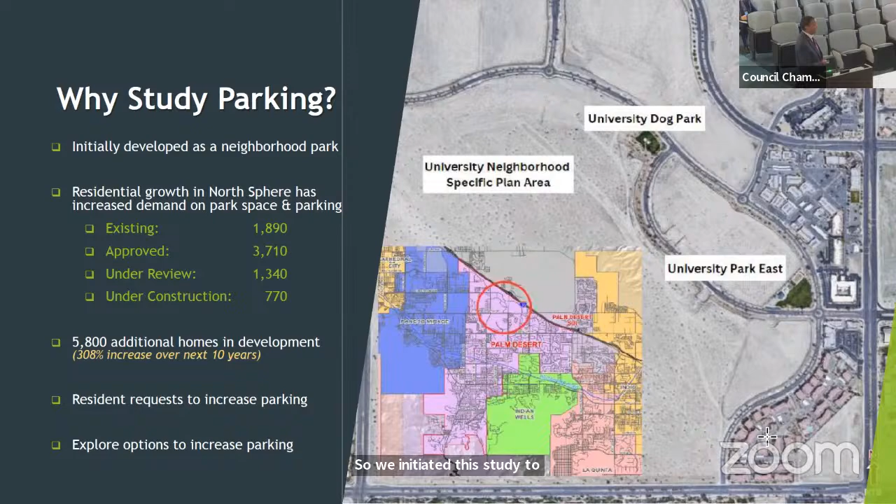Currently, the University Dog Park is sitting on the southwest corner of College Drive and University Park Drive on the north side of the city. There is no parking on both sides of the streets on College Drive and University Park Drive. University Park Drive and College Drive share the same roadway characteristics. They're both 46-foot wide from curb to curb with 11-foot travel lanes in each direction and a 6-foot bike lane on both sides of the street, with a raised 12-foot median island separating the two directions of traffic. However, the speed limit on University Park is 35 miles per hour, and on College Drive it's 40 miles per hour.

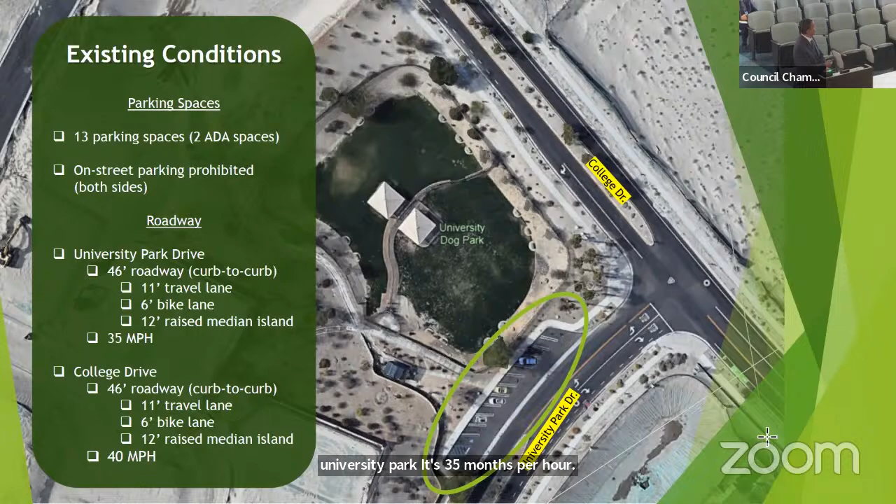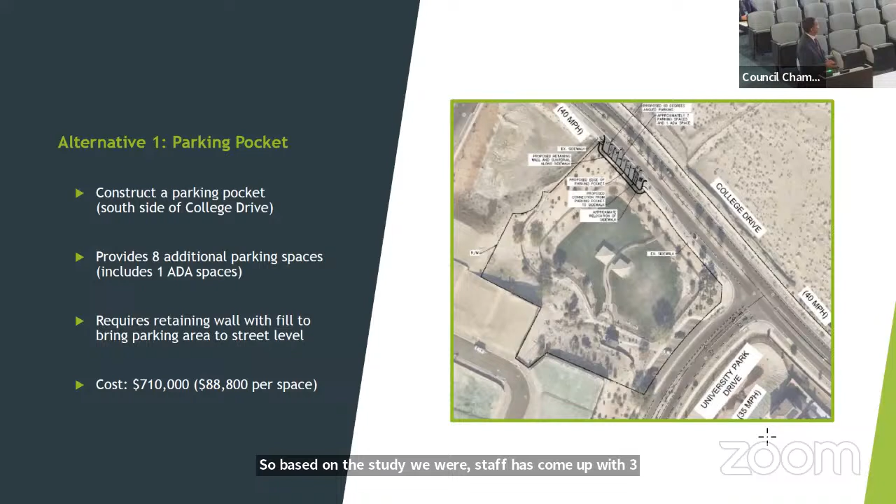Based on the study we performed, staff has come up with 3 alternatives for possible additional parking spaces. The first alternative is to build a parking pocket on the south side of College Drive. This alternative will provide 8 additional parking spaces, of which 1 is an ADA space. However, because this location is sitting very close to a slope, there will be a lot of earthwork required, as well as a retaining wall to keep the parking level at the street level. The cost of this option comes out to about $710,000, or almost $88,000 per parking space.

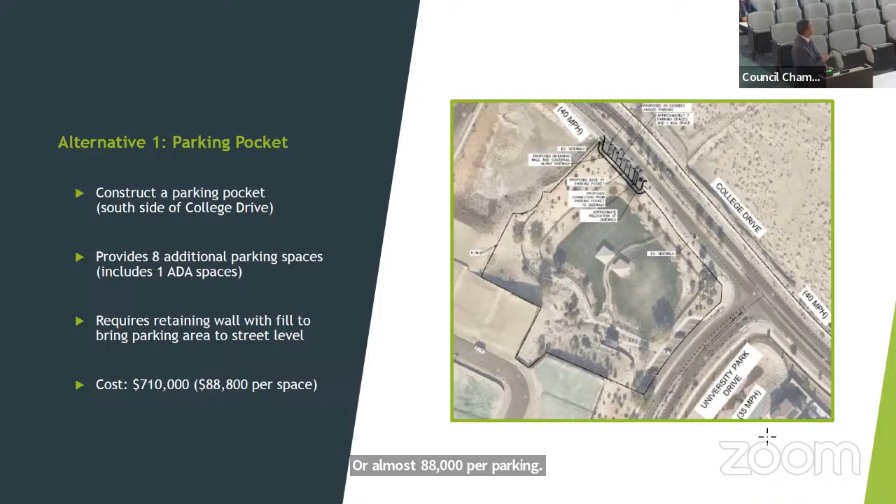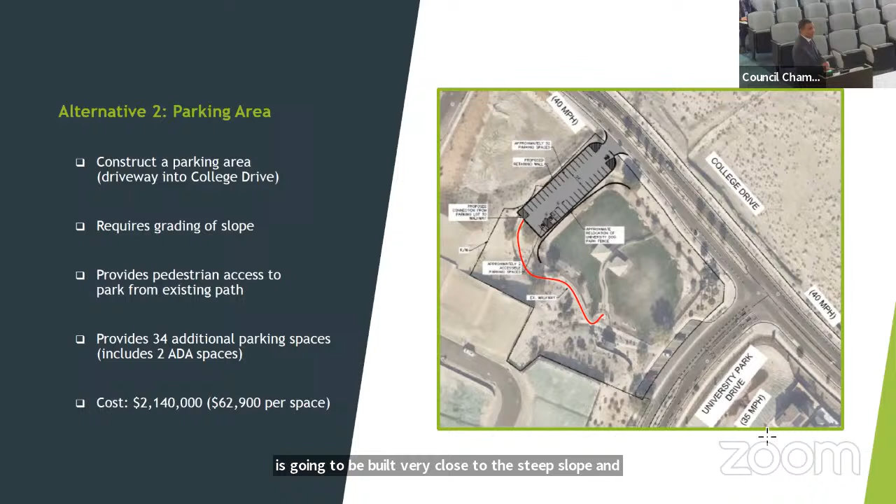Alternative 2 is to build a parking area above the dog park. This parking area will have vehicular access from College Drive, and it will have pedestrian access from the existing pathway shown here in the red line in the picture. This option will provide 34 additional parking spaces, of which 2 will be ADA spaces. However, just like the first alternative, this is going to be built very close to a steep slope, and therefore a lot of earthwork and retaining wall will be required to stabilize it in place. This alternative comes at the cost of $2.14 million, or almost $62,900 per space.

Alternative three is street parking, which will be on University Park Drive between Baylor Way and College Drive. In order to install on-street parking on this section of roadway, we have to remove the existing median island as well as the bike lanes on both sides of the street. We will be diverting bicycle traffic onto the sidewalks, and that would provide 42 additional parking spaces on both sides, almost 21 per side of the street.

However, if we go with this alternative, we need to install a mid-block crosswalk. This crosswalk will have rectangular rapid flashing beacons, also known as RRFB units. This alternative has two options: either we go with the raised crosswalk or just a striped crosswalk. If we go with the striped crosswalk, the cost will be around $440,000, or $10,500 per space. If we go with the raised crosswalk, the cost comes out to almost $700,000, at about $16,500 per space.

Here's a summary of the alternatives we just presented and the total cost of each. With alternative one, the parking pocket, we're looking at an additional 8 parking spaces at a cost of $88,800 per space, or a total of $710,000.

Alternative two is the parking area above the park, which will give us 34 additional spaces at a cost of $62,900 per space.

That's $2,140,000 total. Alternative three depends on whether we go with a raised crosswalk or a striped crosswalk. With the raised crosswalk, that gives us 42 spaces at $16,500 per space, or a total of $694,000. With a regular striped crosswalk, the cost comes down to $10,500 per space, or a total of $440,000.

With that, I conclude the first part of my presentation, and I'll take questions.

Can you go back to that prior slide? This one? So on University Park Drive, is that where we'd be putting the crosswalk? Yes. What's the speed limit on that street? 35. That was my only question at this point.

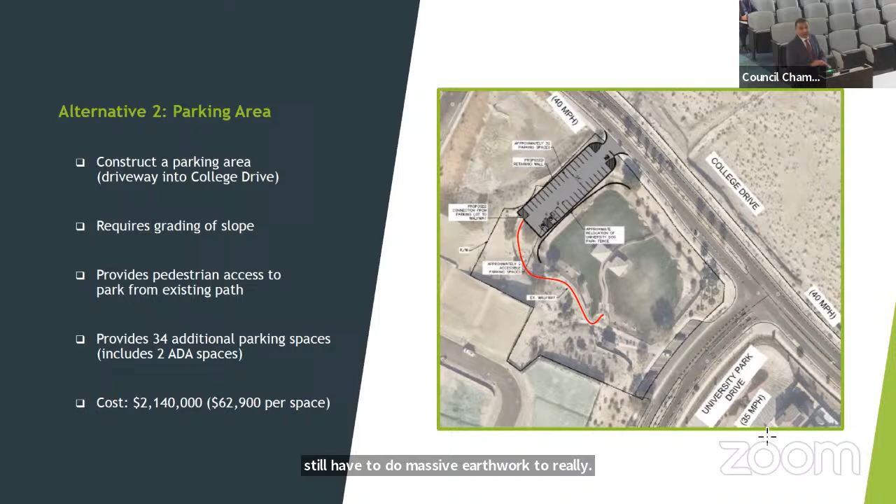I haven't looked into that option, but the issue we have here is the steep slope area. Even with an informal, unpaved parking lot, we'd still have to do massive earthwork to flatten it out and make it accessible for traffic. Okay, thank you.

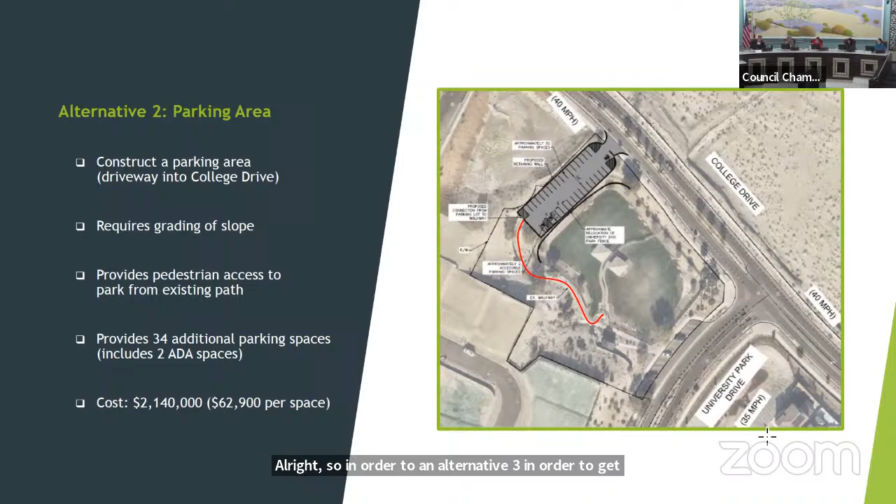So for alternative three, in order to get those 42 parking spaces, what length or distance are we talking about along University Park? Quarter mile, half mile? From Baylor Way to College Drive, it's about 800 feet in total.

Oh okay, and this is a little outside what you presented today. However, I understand the 27-acre park we're going to have on the north side of the city, the PASEO park, will have a dog park. So I'm wondering, long-term, if alternative 3 could be reversed if the pressure on that dog park is alleviated by having another dog park on the north end of town. It's just food for thought. We may also have another larger park coming in at Frank Sinatra and Portola which could add a dog park, so just thinking down the road.

Thank you. It could be reversed by removing the parking spaces. Exactly. Alternative 3 seems to me like the one that could most easily be reversed. Yeah, and at that time, whether we want to go back to the same existing configuration or just leave it open with a striped median instead of putting it back. Perfect, thank you.

Okay, so I'm looking at alternative 3, did we label them A and B? Yes we did. So College is 40 miles an hour, right? And do you think that's an advisable rate of speed? Well, these speed limits were established based on speed studies.

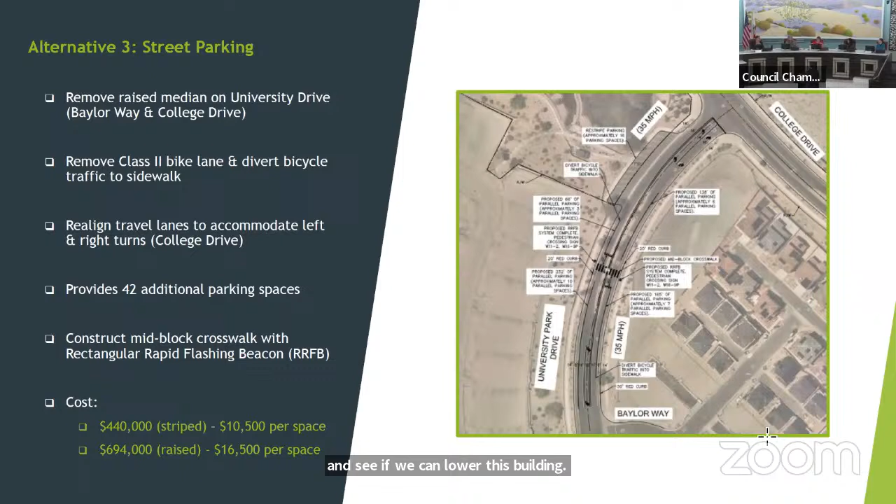I had noticed the same thing in terms of driver behavior going from one speed limit into another. And I see the clear need to create opportunities. In fact, there had been one resident that called very many times when she would see people that were parked illegally. And I'm sure this contributed to how we can create a solution. I think that going out of our way to have a lot of parking beyond that, I don't think would be very helpful. I also didn't see how many of those would be designated as ADA parking spaces. It just said 42 spaces.

And as mentioned, the fact that we will have a regional park that will have its own dog park will reduce the stress on this park. And I think it would not be wise to make an expense on such a great scale where we may feel like we overdid it in one need. And when we install on-street parking, we usually do not designate ADA spaces. But the other ones mentioned, so that's why I was asking. Yeah, the other ones would have it, yes.

How many ADA spaces currently exist? The existing ones are two. I'm sorry, let me just double check, the existing ones you're talking about, the ones we have? Yes. Two ADA spaces? Yes. A total of 13. Okay, so if we did put on-street parking, we could designate perhaps one or two more of the 13 as ADA? Yes, we can.

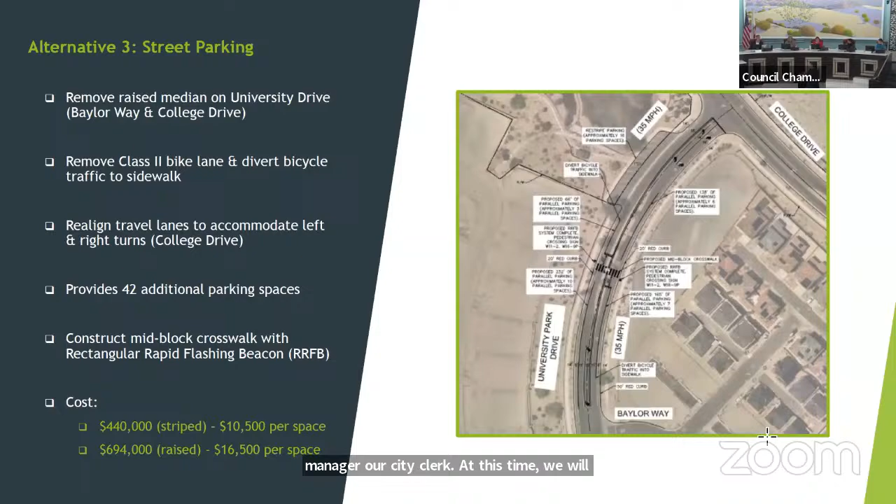We're now starting the second part of this session, the El Paseo mid-block crossings. We'll go over why we did the study, examine the existing raised crosswalks, make recommendations, go over the new crosswalk alternatives and recommendations, and the overall total cost summary. Merchants on El Paseo have requested the city install additional raised crosswalks on El Paseo between Highway 74 and San Pablo Avenue. We divided this study into two parts.

We examined the existing crosswalks in the area and the feasibility of continuing to keep them. And we also looked into the feasibility of installing 3 new crosswalks within the section between Highway 74 and San Pablo.

Of the current existing crosswalks, we have one on El Paseo between San Pablo and Larkspur Lane. The other one is on El Paseo between Larkspur Lane and San Luis Rey. And the third one is on Larkspur Lane between El Paseo and Shadow Mountain, the one in front of Hotel Paseo. All 3 locations are currently equipped with rectangular rapid flashing beacons, also known as RRFBs.

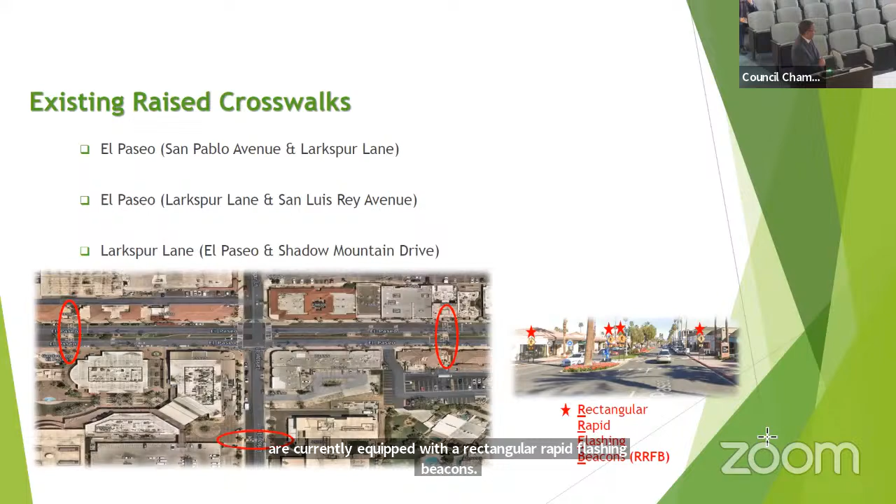Here's a look at the existing crosswalk in front of the Hotel Paseo. So based on the study that we performed, the staff is recommending to keep the 3 existing raised crosswalks on El Paseo. However, staff is also recommending replacing the existing RRFB units at all 3 locations, replace them with new

units. With the exception on Larkspur Lane, because the existing sidewalk on the west side of the street is very narrow. So the installation of the RRFB units would really limit the space, and it may be an issue with meeting ADA requirements, and also putting the RRFB units very close to the street, making them prone to being hit by high-profile vehicles.

So in order to mitigate this issue, we are recommending installing a bulb out, also known as a curb extension, on both sides of the street to give us the space we need to accommodate an ADA compliant sidewalk, as well as be able to install our equipment without it being hit by vehicles.

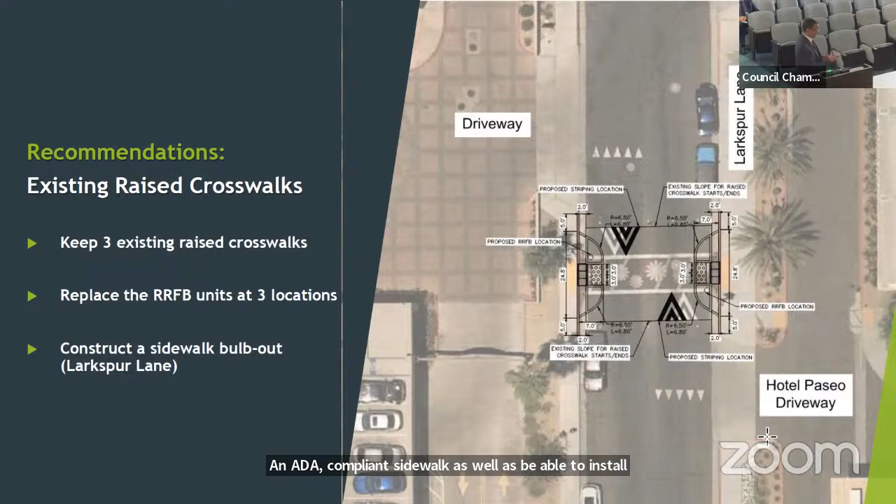So with the three existing crosswalks in the El Paseo area, again, we are recommending to keep the two on El Paseo and replace the existing RRFB units. And that comes at a cost of $130,000 per location. And on Larkspur, because we are recommending installation of the bulb outs, we're looking at $240,000 at that location of improvement. So total improvements on existing raised crosswalks come to about $500,000.

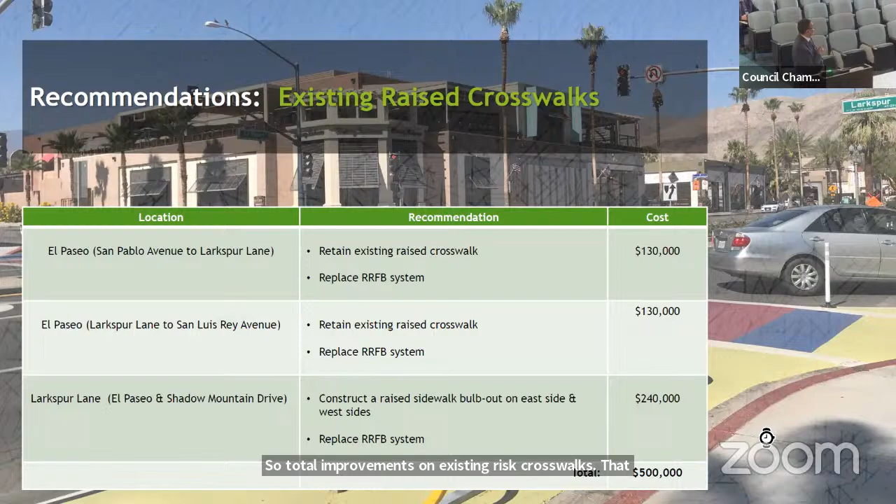Now we're moving to the second section, which was the evaluation of potential installation of new raised crosswalks. We divided the section of the road into three segments. The first segment is El Paseo between Ocotillo Drive and Sage Lane. The second segment is El Paseo between Sage Lane and Lupine Lane. And the third segment is the one between Lupine Lane and San Pablo Avenue.

In the study here, we did field observations of existing roadway conditions as well as pedestrian crossing patterns. We took traffic volume counts, and we also analyzed the 5-year accident history, vehicles versus pedestrians. So based on our observations, the accident history had no vehicle pedestrian accidents in the past 5 years.

And the existing field conditions for the section between Ocotillo Drive and Sage Lane: it's 800 feet long. The fronting development consists mainly of a lot of restaurants and a jewelry shop there. There are two pedestrian connecting passages that take you to the parking lot behind the shops. There are no driveways along this segment of the road.

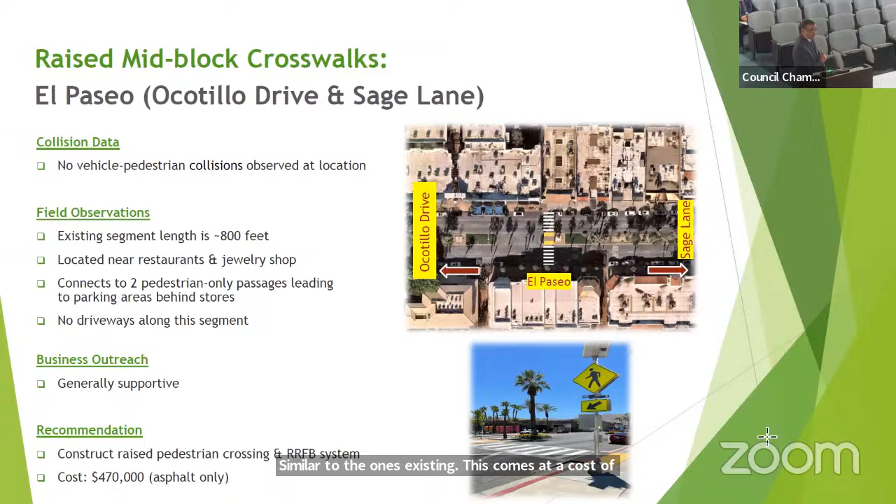The second location is El Paseo between Sage Lane and Lupine Lane. And again, in the 5-year accident history, there are no vehicle pedestrian accidents. This segment of the roadway is 675 feet long. The fronting developments are mainly retail stores with 2 jewelry shops in the area. And there are 2 pedestrian passages that connect the street with the parking lots behind the shops. There are also no driveways along this segment of the road.

And again, we did the outreach here and we got majority support from merchants in the area. Staff is also recommending the construction of a raised pedestrian crosswalk within this segment along with the RRFB units. And again, the cost here, if we just go with regular asphalt only, is going to come out to $470,000.

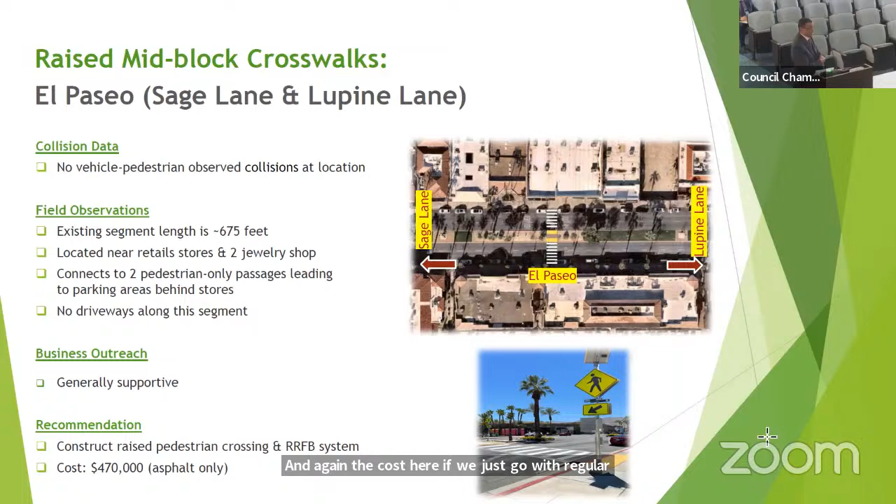The third segment is El Paseo between Lupine Lane and San Pablo. No accidents reported in the last 5 years. Field conditions revealed that the total length of this area is about 510 feet. Again, the fronting developments are retail stores and a coffee shop there. And this connects shopping centers with the interior of another shopping center in the area. However, there is a driveway that fronts El Paseo on this segment that is located almost halfway between the 2 intersections.

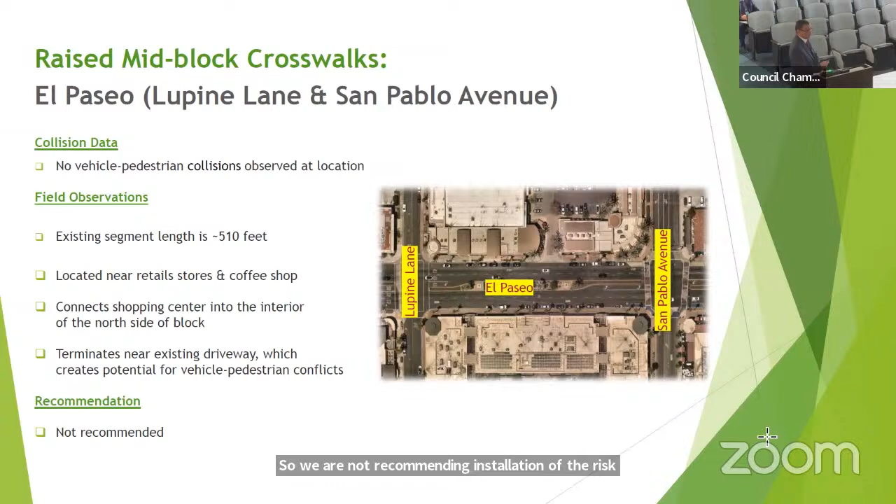Because of this driveway, it will be very difficult, or non-compliant actually, if we install another raised crosswalk in the area, because that will put us closer to one end than the other end. And that could be a problem not only in terms of meeting requirements, but also pedestrian crossing patterns. So we are not recommending installation of a raised crosswalk on this segment of El Paseo.

So here's a summary of costs involved with those options. So on El Paseo, between Ocotillo and Sage Lane, as well as El Paseo between Sage Lane and Lupine, we're recommending the installation again with the raised crosswalk with the RRFB units. This comes out to about $470,000 each, or a total of $940,000 for the new crosswalk.

We were looking into also other surface treatments that we can use, obviously, to make it look nice and beautiful in our neighborhood. We looked at several options here, and if you use a high visibility ladder type crosswalk, that will add $27,000 per location to the cost of $470,000.

If we use brick pavers with only one color, we're looking at adding $32,000 per location. If we go with new decorative flowers art paint, similar to what's existing now, we're looking at an additional $34,000 per location. Or if we go with interlocking pavers with multicolored designs, that will add $35,000 plus to the cost.

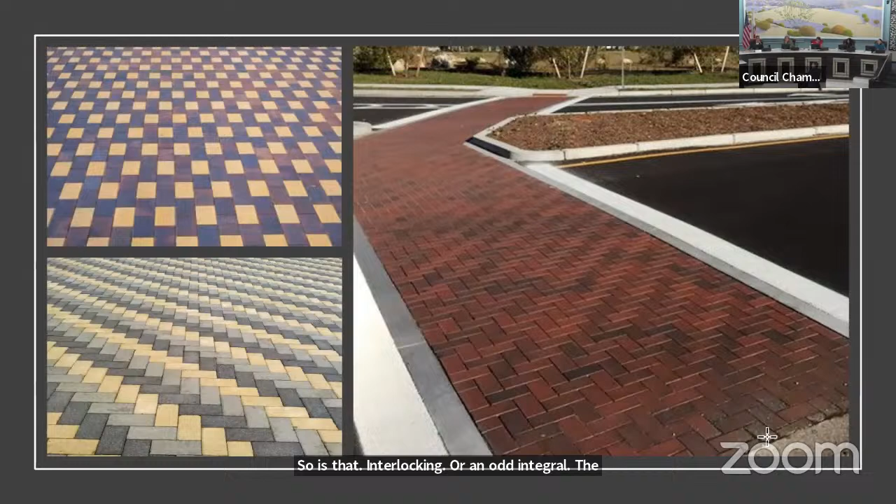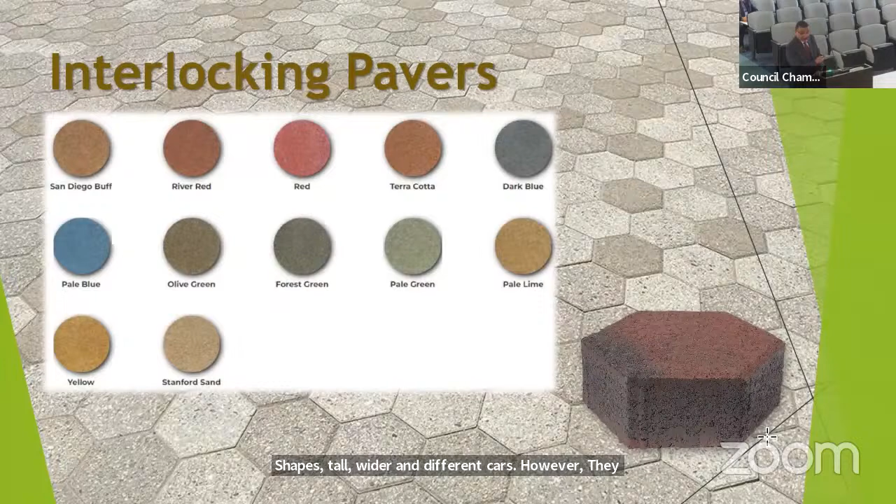So is that interlocking or not interlocking? Actually, both of them are not interlocking. If I go back one more time, here is what the interlocking looks like. And it's not just hexagonal like this one; they also come in different shapes, taller, wider, and different colors. And speaking of additional costs, if we go with interlocking and decide to make it look like just a regular brick, they can also come up with something similar to that.

So maybe it should be obvious, but it's not. What's the key definition that makes pavers interlocking? Because from a layman's perspective, when I see a pattern like this, it seems like it's interlocking, but you're telling me these are not examples of interlocking.

No, they're not. When I showed these, they were given to me by the vendor I talked to, and he was just telling me we can do something similar to this with our interlocking pavers, so we can do something fairly attractive without crossing the interlocking threshold. That's what I'm trying to find.

It's possible, yes. If we use 2 or 3 different colors, we can come up with an attractive design. And for the benefit of the full council, the ATP subcommittee did ask for the opportunity to look at some samples, so examining a wide array of samples would help us bring back a final proposal to the council for action. But feedback today will tell us which avenues are worth delving into in greater detail.

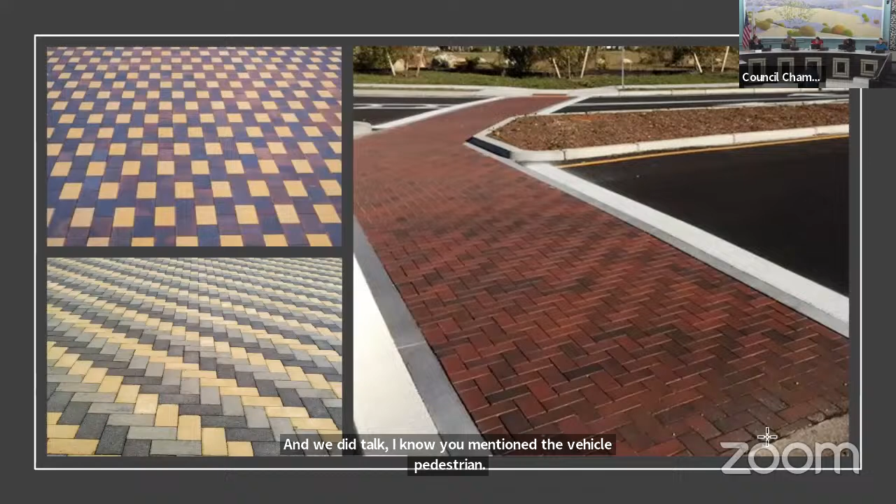Following up on that same concept of pedestrian injuries versus car to car, I had a meeting with a local business owner and they mentioned that at one point the city had crosswalk lanes going along Prickly Pear, and at some point, after some renovations, they no longer have the lines.

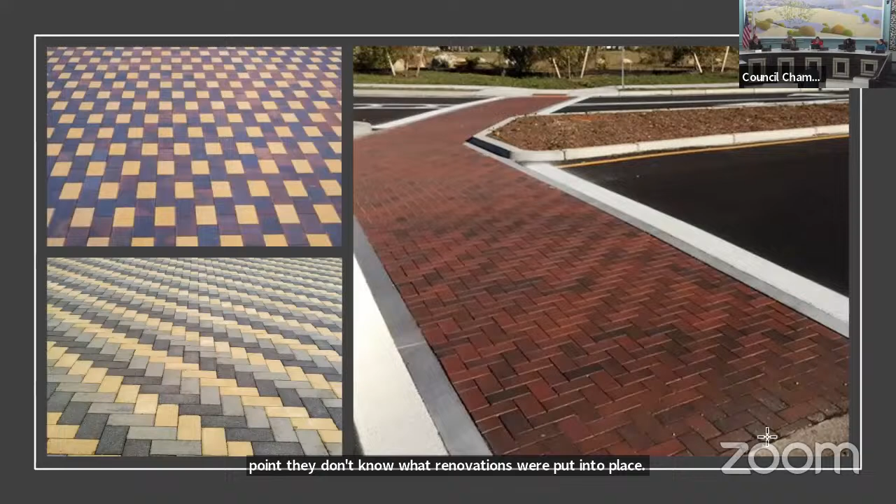When people come in from university or from College Drive onto University, the speed on Portola as they turn into El Paseo from that green light is very fast. I also saw people that didn't see the crosswalk and would jaywalk in the middle of the street. We've told our California neighbors in the Coachella Valley they shouldn't jaywalk, but we've got international visitors where that isn't a big issue to them. This business owner also mentioned they've seen vehicle collisions where a woman was dragging her bumper along the way. I think as this continues to be revised or explored, we should look at additional crosswalks where this would be a safety issue, all the way down where they've had collisions.

That's east of San Pablo you're talking about? It's right at Portola. All right, Portola, okay.

If we proceed with doing these crosswalks, which requires asphalt work, is it planned to be done in conjunction with repaving the entire street? Actually, yes, if we get direction from you. I'm working with Ryan Geller on this, and we can probably get it done at the same time.

Are these cost estimates based on that, or are these estimates based on a standalone project? Yes, it is standalone to answer your question. So if we wrap it up into the entire project of repaving El Paseo, does that give us any cost savings? Probably will, because we're likely going to end up using the same contractor and maybe get a discount by him hiring his own subcontractor.